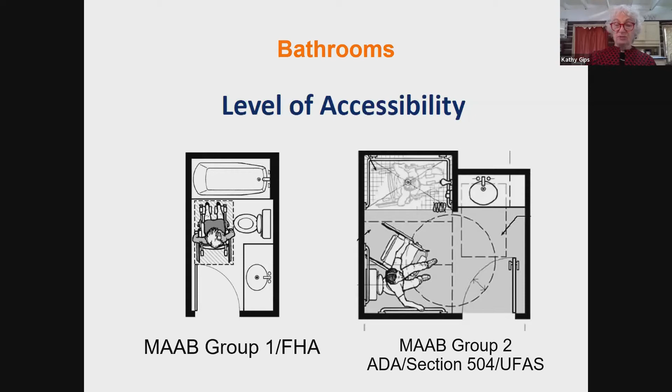So just to give you a little sense of this, and we'll be going over the design requirements next week on the 26th. Just to see on the left, the MAAB Group 1 for housing doesn't have a turning space. There's some wheelchair spaces at particular elements, but if you can't get out of your wheelchair, this is really not going to work. The one on the right, the Group 2 and the ADA and Section 504, is much bigger, and that's going to apply, as I said, to the 5%.

Same with the kitchen: the smaller ones have requirements for clear floor space at particular appliances, but there's not a requirement for a turning space. So the other ones are going to be larger.

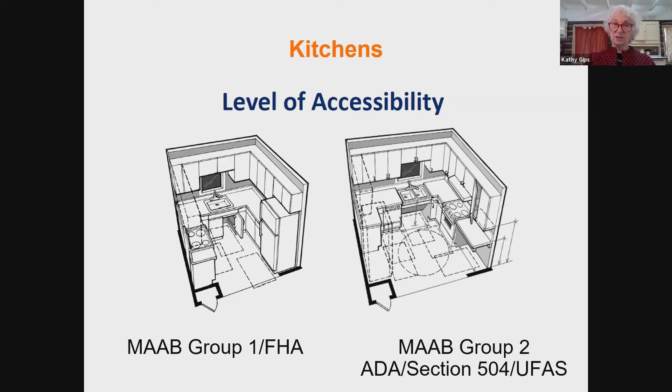So that's just going to give you a little overview of what we're talking about with the two kinds of mobility accessible units. So today is on scoping, it's not on design. And what we're talking about is what laws and standards apply and what types of units are required.

And it's really important to figure this out, because if you're not in the right law and you're not in the right standards, you're lost from the beginning.

When people contact us, these are all the questions that we ask. Who owns it? Is it private or is it state or local government? How many units? Is it new construction? Is it an alteration or an addition? If it's an alteration, what is the cost, and what is the equalized assessed value of the building?

Debbie will get into this. Is it receiving federal financial assistance? Is there an elevator in the building? Are units single-story flats or multi-story? If they're multi-story units, is there an internal elevator, or is it designed for a later installation of an elevator? These are all the things that will help you figure out which law, which regulation, which standards you should be in.

And I'm going to turn it over to Debbie to talk about the Mass Architectural Access Board. So Deb, you're on. Thanks, Kathy. Welcome, everyone. So what I'm going to do is give you a little background on the State Access Board.

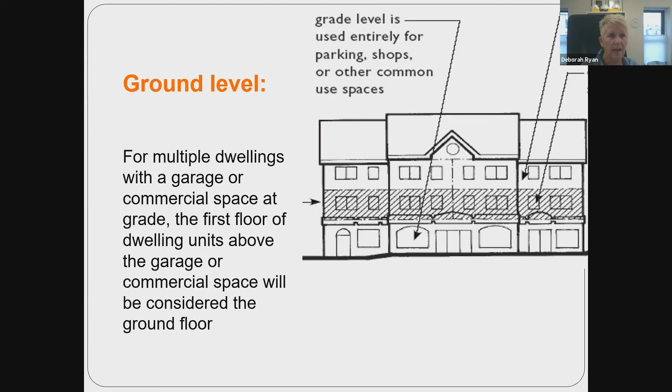Under what defines a ground level unit? For multiple dwellings with a garage or commercial space at grade, the first floor of dwelling units above the garage or commercial space will be considered the ground floor. This happens a lot in Boston, where you have a 3-unit, the old triple decker, with parking on the ground floor and 3 units above that. The ground floor will technically be the 2nd floor, and access must be provided up to that level.

When dealing with additions, Group 1 units will be required if it's a new construction portion of an existing multiple dwelling. For example, if you have an existing multiple dwelling with 10 units built in the 80s, and you're adding a 2-story addition with 10 units total, 5 on the ground floor and 5 on the 2nd, with no elevator being provided, the 5 units on the ground floor are covered and must meet the requirements of Group 1. The existing units are not covered, and the units on the 2nd floor are not covered.

If it's the same building and you have no units on the ground floor, and you're adding 5 units on the 2nd and 5 units on the 3rd with no elevator, you are required to either provide a Group 1 unit on the ground floor, or vertical access to the 2nd floor must be provided, with the 2nd floor being the first level of housing.

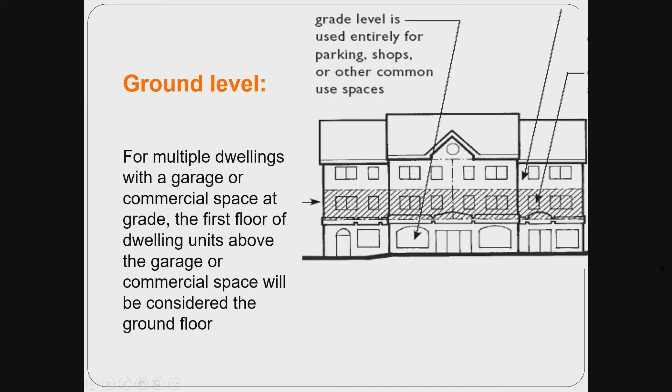That's... let me make sure I'm going in the right direction. Oh, there we go. Okay, so that's the end of the MAAB Group 1 portion.

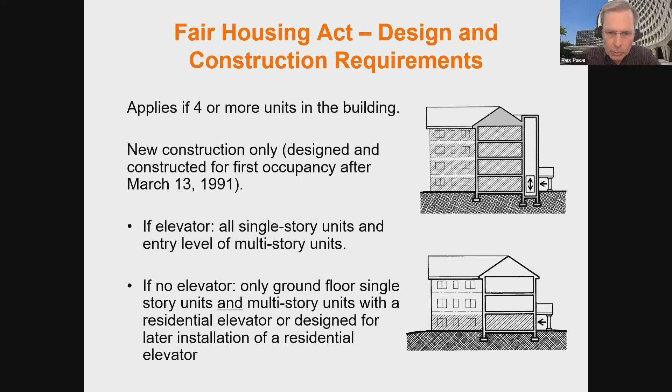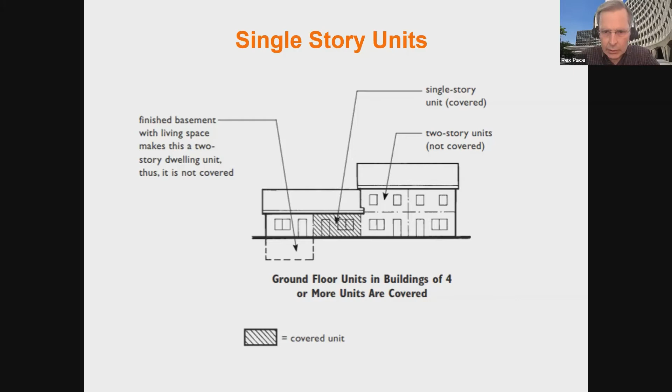When we have a building that has an elevator, all the units are covered. If that's a common use elevator and we have a two-story townhouse-style unit within that building that you're accessing from the common use elevator, then the primary entry floor would be covered - not the entire unit, but the floor you enter on from the common use area or primary entrance.

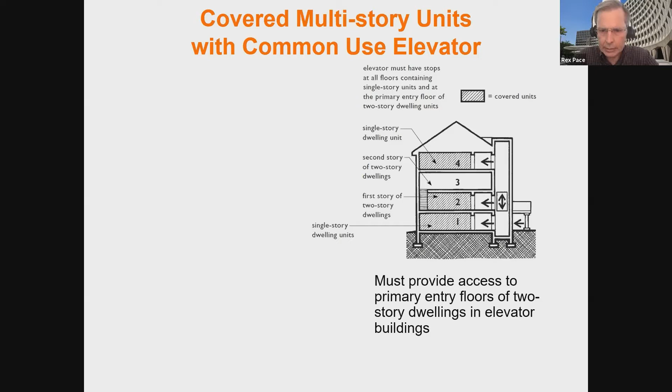If you have townhome units with an elevator internal to those individual units - something presumably higher end and probably not as common - if it has an internal elevator provided, or has the option where there's a shaft allowing installation of a residential elevator at a later date, then that entire unit would be covered under fair housing, again if it's in a development of 4 or more units.

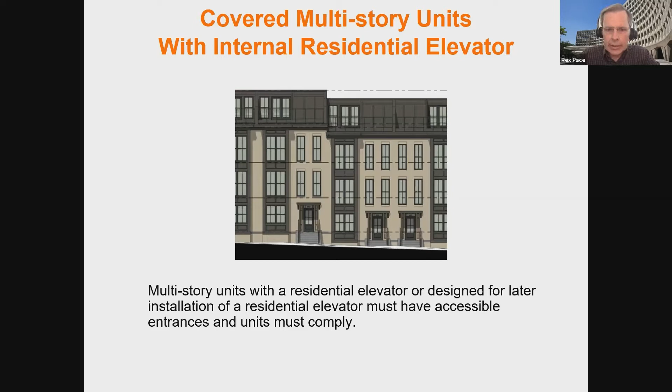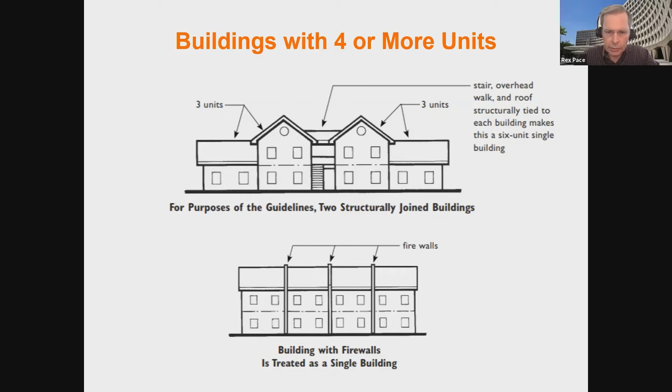Likewise, a building can have firewalls, and those firewalls do not make them distinct buildings for purposes of fair housing. In the example at the bottom of the slide, we have 4 units separated by firewalls that's still covered by fair housing. Actually, in this case, it's 8 units because each story is a single unit dwelling.

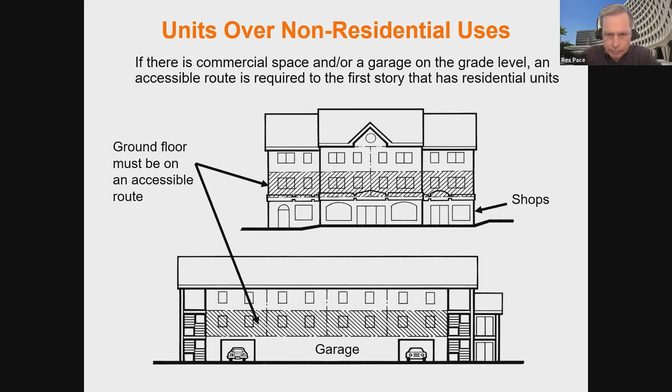Now, you don't necessarily have multiple ground floors because of this design issue. For instance, if you had a building split between single story units at grade, and another series of single story units over a common use garage, you would only consider those units at grade to be the ground floor. You wouldn't create another ground floor by raising units up over the common use garage or retail spaces.

So you're not necessarily required to have more than one level at grade. There are instances where, because of a sloping site, you might have multiple ground floor levels, but that will only be because of the grade, not because you're raising other units over spaces when others are at grade. Hopefully that made sense. Let's go to the next slide.

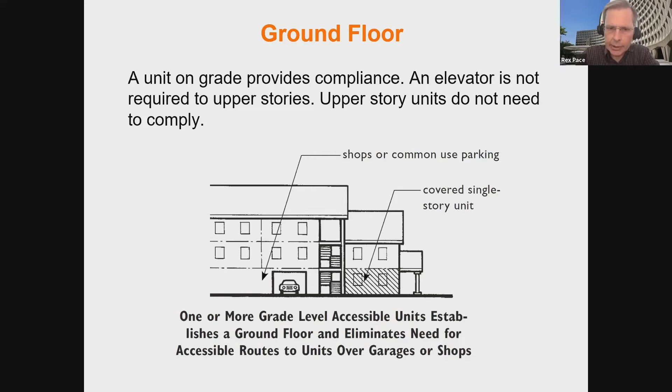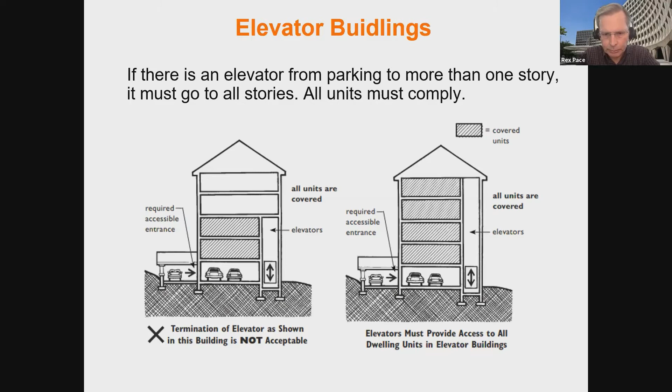So what is an elevator building? You want to be careful about this. In the example on the left, we have an elevator that goes up to 2 of the floors, and you would walk up to the rest of the units. That would still be an elevator building and would be completely covered by fair housing. Once you go beyond the ground floor level with an elevator, it's an elevator building. So what you really have to do is what's shown on the right, where the elevator goes to all the units. Let's go to the next slide.

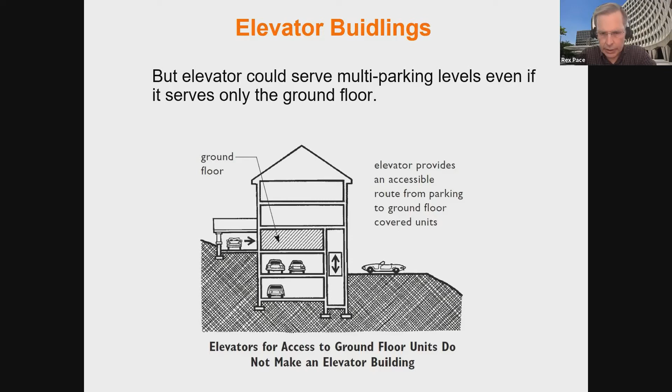There is a bit of an allowance, so to speak. If you had an elevator going between garage levels, from a lower garage level buried underneath the structure up to the first floor, that does not create an elevator building. That's okay, it doesn't turn your building into an elevator building. You could still have the floors above grade not covered, not compliant. So let's go to the next slide.

And that takes us to the end of fair housing. I guess we'll take it back up with Debbie.

Okay, great. Thanks, Rex. So we're switching to the AAB's scoping requirements for Group 2 units, where there are a lot of questions you need to ask to find out whether you need a Group 2 unit. Group 2 units apply to new construction, reconstruction, and alteration. It applies to developments with units for rent or hire, but does not include units for sale, so owner-occupied condominiums are not covered under the Group 2 requirements. There has to be 20 or more units in the complex or project, and it's not a per-building requirement.

So you could have 2 10-unit buildings and they would be covered. You are required to provide 5% of the total amount of units in the complex or project, and they are required to be mobility accessible. For people who have been doing this a long time, these are the old 5% accessible units.

Additionally, 2% are required for people who are deaf or hard of hearing. The 5% of units must be proportionately distributed according to bedroom size, quality, price, and location. And in this instance, townhouses are not exempt from the 5% requirement.

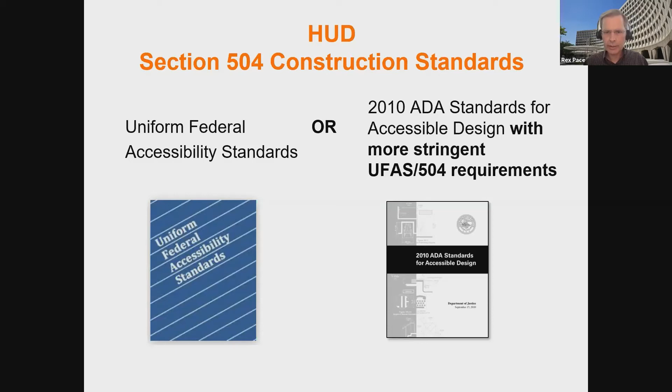HUD has different requirements, and we'll get into this more. We still officially, in our regulations, refer to the Uniform Federal Accessibility Standards, or UFAS, for our new construction requirements. But we've developed an option where people can use the 2010 ADA standards if you apply the more stringent requirements of UFAS and Section 504. We'll talk more about this in the technical section, but you do have an option, because many of you will have an obligation to the 2010 standards, and we're aware of that. We've put out notice of how you can use that as an alternative accessibility standard. Let's go to the next slide.

So first off, who is a recipient? We interpret recipient of federal financial assistance very broadly, virtually any form of financial assistance, and that can include the gift of property. There are some things that are not covered. For instance, guarantee or insurance is really not something that would be considered financial assistance. So there are some very broad items that we would exclude. But for the most part, if you're getting money from HUD, you will have obligations to the Rehabilitation Act, and in particular Section 504.

This could be things like funding to public housing agencies, community development block grants—I'm sure a lot of you are familiar with that—the Home Investment Partnerships Program, which encourages home ownership, and obviously our programs dealing with supportive housing for the elderly or supportive housing for people with disabilities will surely have these obligations. So our requirements cover a lot of different entities: state and local governments, agencies, nonprofits. Private entities can have requirements too, and they may very well be more stringent than your obligations to other things you're mandated to comply with. Let's go to the next slide.

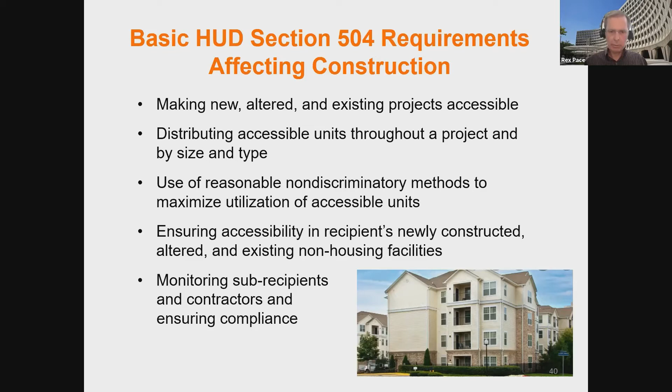So the kinds of things that Section 504 requirements affect in construction: of course, anything you build new or alterations you do will have requirements, but you may also have existing projects that you're not planning to touch, and there could very well be program access requirements that would obligate you to make changes to those too. So this is not just new construction and alteration requirements, although that's what I'm going to focus on today. We have many requirements that require accessible units be distributed throughout a project by type and size, so we want dispersion, so to speak. We also have requirements that affect how you advertise and rent out or sell units to individuals with disabilities. And we also do monitoring of who receives our grants—we do compliance reviews, we check into what people are doing, and we request that people report in on their activities of how they're making their developments accessible. Let's go to the next slide.

So when do the new construction requirements kick in under Section 504? We require them for multifamily housing, which we define as 5 or more units. So remember, this is when the new construction requirements would kick in if you're building a project. Now, that's not really a site limitation—that's really under one contract. So you could be doing multiple units scattered between different sites, and that would meet the 5 or more unit requirement, and it would be covered. All non-housing facilities that you build must comply. Common use areas or community centers will need to be accessible. And remember that everything is covered by our program access requirements, regardless of the number of units.

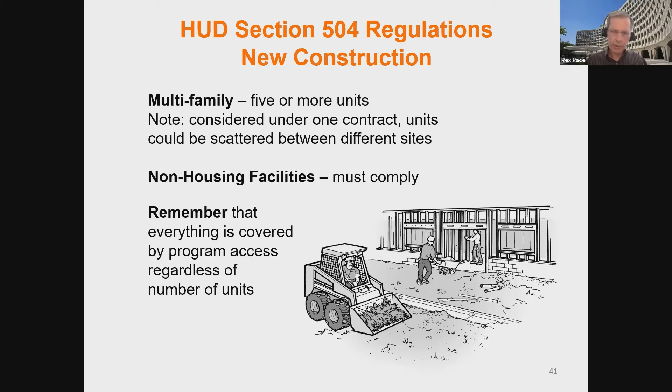So you may be going to a community and you decide to build an infill project—maybe a duplex in a community. Technically, if that's the scope of the project, it doesn't fall under our new construction requirements. But you would still need to evaluate things in terms of program access. Maybe you don't have any accessible units in that area of the city, or you haven't built accessible units in other projects for a while in that area—then maybe this would be the time to do it.

Let's go to the next slide, please.

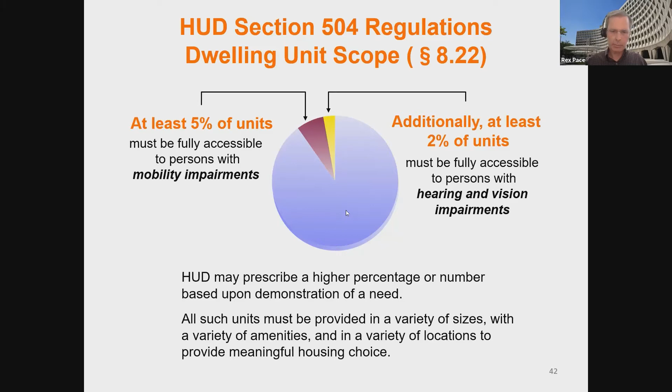In terms of the number of units required, it's similar to some of the other legislation we're speaking to today. 5% of the units must be fully accessible to people with mobility impairments—these are mobility accessible units. An additional 2% must be accessible to people with hearing and vision disabilities, referred to in some other standards as communications accessible units, essentially the same thing. HUD can prescribe a higher percentage of units depending on a situation where there's a demonstrated need because of the population in a given area, although oftentimes we do this because we're in a settlement or agreement with a housing provider who failed to provide enough housing in the past, so we make them provide more in their future projects.

Let's go to the next slide, please. So that was new construction. What do you do in regard to alterations?

You need to be careful. You really have to look at the regulations to understand what we expect regarding alterations, because it is distinct from what you might see in an accessibility standard. First off, we have a requirement for what we call substantial alterations, where if you make a substantial alteration, it has to meet new construction requirements, not alteration requirements. There are some major stipulations, however. First, it has to be a project with 15 or more units, and you have to be renovating it to the extent that equals 75% of the replacement cost of the completed facility, which is a really high standard—you're essentially stripping down a building to its structure, its floors and support columns, and rebuilding it. So it's like a new construction situation.

Everything else falls under other alterations, and you want to be careful—this is more typical of what you'd think in terms of alterations in scope and intent. You need to be careful that a series of small alterations may amount to a major alteration. For instance, you might be doing a series of secondary alterations to a unit, but considered collectively, this may mean the unit needs to be entirely upgraded to be accessible. It's very similar to some requirements you'll find in the ADA.

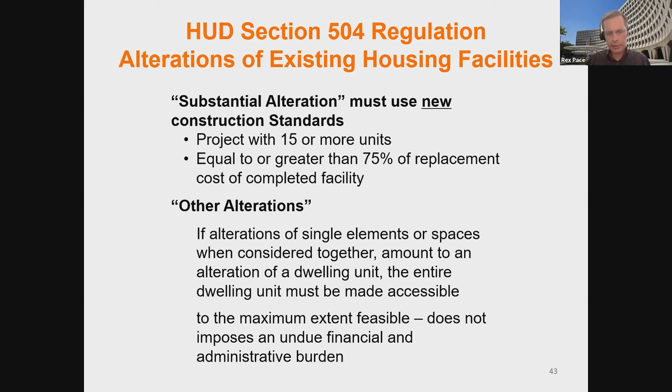The big thing I'd say about alterations is you'll hear talk today about percentages of costs you're spending. I'd say that under Section 504, the standard for when you don't make an alteration accessible is higher than a lot of other standards, because really you're required to make your alterations accessible to the maximum extent feasible. What that means is it does not impose an undue financial or administrative burden, which could be higher than other alteration situations under the ADA or some state codes.

Let's go to the next slide, please.

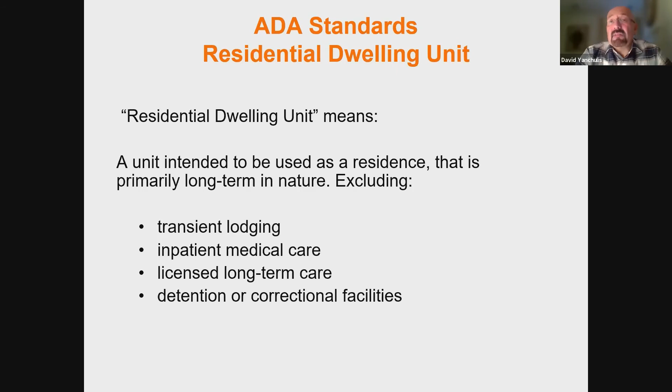And we're defining it this way to help people, besides some of the clarification we saw in the regulations from DOJ, really trying to help users determine what sections of the standards should apply as a residential unit versus those sections specific to transient lodging, which is sleeping accommodations used on a short-term basis, or inpatient medical care, inpatient bedrooms, or licensed long-term care, or detention and correctional facilities. So we're really defining these terms in the standards to be mutually exclusive. If you have a transient lodging or a medical or long-term care facility, that by definition is not going to be covered as a residential unit for purposes of the standards and which sections to follow. Next slide.

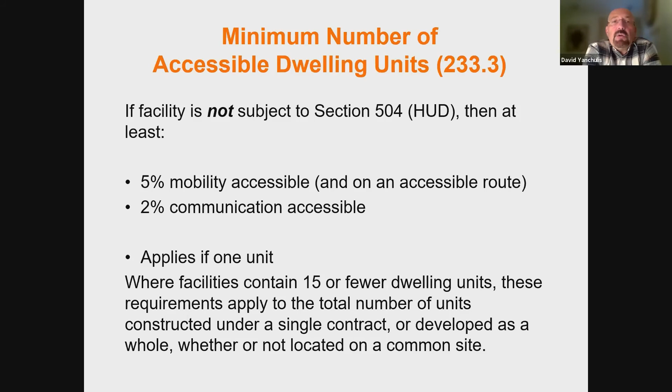We also pick up similar language from the 504 regulations that allows you to apply the minimum number to 15 or fewer dwelling units developed under a single contract or developed as a whole, whether or not located on the same site. So often the ADA standards look at and apply things site by site, but when you have facilities with 15 or fewer dwelling units, we allow you to combine them if they're developed together or under a single contract across multiple sites for purposes of applying the 5% and 2%. They're still covered, but it allows you to base the 5% and 2% on the total developed as a whole under a single contract.

We also have requirements similar to those in the Rehab Act about dispersion of accessible units, so there's a comparable degree of choice for residents with disabilities. If you have facilities with multi-story units, the ADA standards also allow you to provide access to a 1-story unit, so long as it has equivalent spaces and amenities comparable to those in the multi-story units.

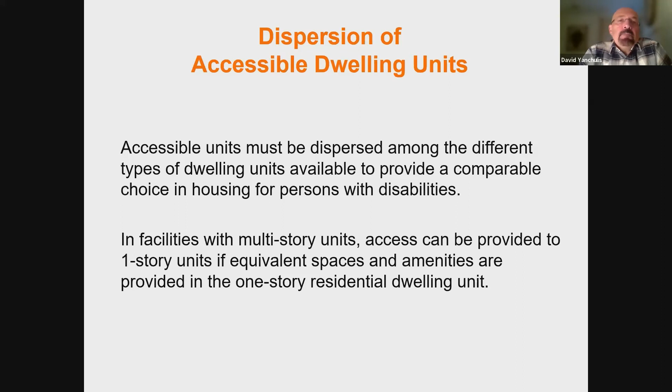When you are making additions to a residential facility covered by the ADA, we apply via the standards the 5% and 2% scoping levels to the total number of units added, not necessarily to the total located on the site.

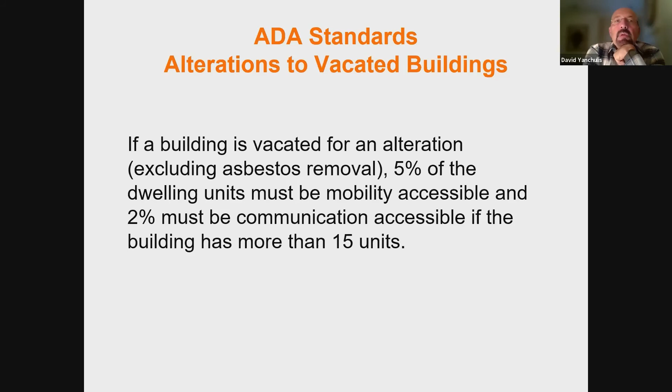In the case of alterations, for facilities not subject to HUD Section 504 regulations, if a building is vacated for an alteration—excluding vacating a building for asbestos removal—then we apply the 5% and 2% to the facility if it has more than 15 units.

We also have a somewhat different framework in the ADA standards for determining what triggers a quote unquote substantial alteration to individual units, where under the Rehab Act we saw equations of 75%. Here we're not looking at cost relative to the value of the building, but instead simply whether you substantially alter a bathroom or kitchen and one other room in the unit—that in and of itself triggers a requirement for the 5% and 2% to apply.

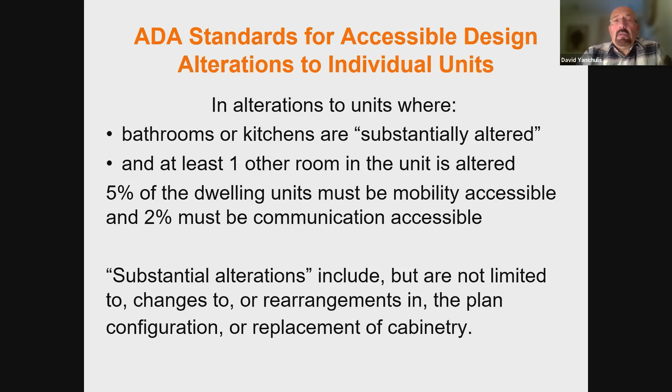What we mean by substantial alteration with respect to a kitchen or bathroom includes rearrangements in the plan or configuration, or replacement of cabinetry, among other things. This is somewhat of a judgment call, but we're really trying to capture alterations significant enough in their impact on the unit to ensure the unit is brought into full accessibility.

There are also provisions in the standards specific to units for sale. If a state or local government is designing and constructing residential units for sale to individuals, the standards ensure the appropriate minimum number are accessible for both mobility access and communication access. There's also a requirement that where a state or local government housing program sells units to pre-identified buyers, the accessible units must be made available upon request of the purchaser.

The ADA is enforced somewhat differently than what we saw under 504. It's modeled as a civil rights law, which also influences its enforcement regime. Under the ADA, one could file a complaint with the Department of Justice, or the other option is to file a suit in federal court.